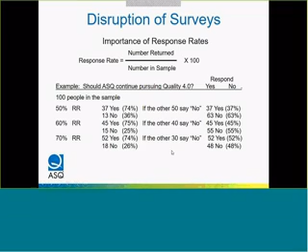And as we look at the response rate increasing, if we have the same 74-26 and the 30 remaining say no, we still have a yes response. So response rate is critical, and it takes a lot of time and effort to make sure the response rate is valid for a survey.

If we want quick information, we can actually take social media information for the voice of the customer. The 5-star ratings that we see when people review products or services, and the comments that they make in those responses from many different sources. So we can take the text, for example, and throw it into something like a word cloud. Interestingly enough, Microsoft Office Word has this capability. You can go into Word in Microsoft Office, and there is an add-in that will allow you to do word clouds.

Then there are what are called dendrograms, where you can actually see the association of terms through branches and get information about interactions of words from what you have taken off of social media. You can't do this for everybody, so you're not allowed to go sneak in and look at the competitor's information, but you can look at social media information regarding your company, your organization, and do these kinds of things. So now what we've done is we've disrupted the survey paradigm and enabled text analytics to be done through taking social media information.

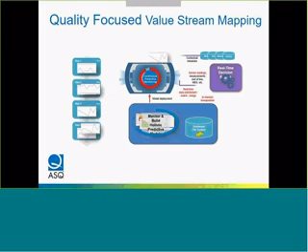The next thing we can look at is the value stream map. As you can see here through this animation, discrete event simulation software can be used to take your value stream map and actually watch how things progress through the process. This does a couple of things for you. One, it can show you how the process is moving, and two, it lets you automate theory of constraints. Anyone who has read The Goal by Goldratt understands the theory of constraints that Goldratt has taught for many years. So now let's look at this in another way. Here's a piece of software that actually does discrete event simulation.

At each one of the nodes in the process, so you put your value stream map into the software, here's your flow, you can actually see in the value stream map the different nodes in your process. The benefit here is that if you're doing something, for example, like a Kaizen event off of your value stream map, you can go out and collect data at each of these nodes, samples of data, and estimate the distribution.

Is it a normal? Is it an exponential? Is it a Poisson? What's the distribution of how things are being processed at each node? Then you can program that particular distribution in and run a simulation. And what it does is then it can show you where are your constraints. So where's Herbie? If you've read The Goal, you know that Herbie is the individual in the book, The Goal, where the author finds where and how to find the constraint.

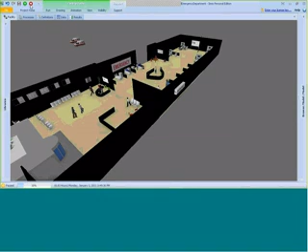I'm going to switch over for a second and show you another piece of software very quickly. This particular piece of software actually gives you the ability to see how a process works. This happens to be an emergency department in a hospital, but you can actually see how this works. You can look at it. It gives you the ability to put in labels so you can see the nodes in your process. You can actually see node labels and see how things move through your process.

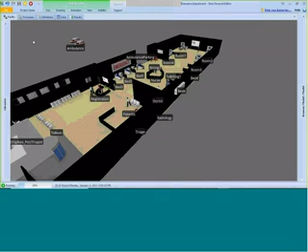So discrete event simulation gives you the ability to simulate what's going on at each step of your process, and there is software like this that allows you to actually see how things are moving. There are examples here that I have for manufacturing. This one is one of the most visual that I use when I'm looking at giving a short talk. See if we can get back to where we were. There we go. So that's discrete event simulation for automating value stream maps.

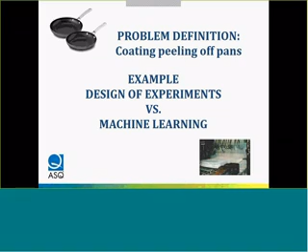So let's see what the comparison is here. So it's an anodized coating that's peeling off. So we're looking at the solution, which is the DOE versus the machine learning predictive modeling approach. The DOE data are collected locally, whereas in machine learning, we can take data from a data warehouse. So now, part one for the execution, let's look at the DOE.

A DOE, we have variables that we control. So the main factor for using a designed experiment is control. You can control the X variables. You have the Y variable, the response variable. And you have noise factors that are in there, which is the error term in the analysis of variance that comes out of the backside of a designed experiment.

So DOEs have some limitations, the number of variables and observations, no use of a holdout set for data, and we'll talk about that in a few minutes, what that brings to the table. And it's not necessarily a predictive model. It's an inferential model looking for differences between the X variables, not really looking to build something that's predictive.

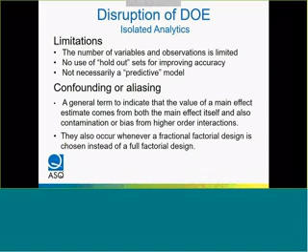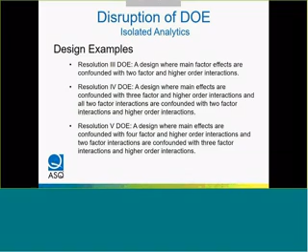Confounding and aliasing, those are statistical terms that show up when you can't take a full designed experiment, you're doing a fraction of an experiment like a Taguchi method experiment. Here's some examples that are in the deck that you'll see when you look at the recording. These are different flavors. All of them have issues as isolated analytics.

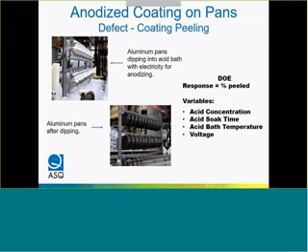So now let's look at how they looked at the problem. They looked at the coating aspect of the process. The pans were dipped into an acid bath with electricity. When they came out, they had the coating, anodized coating on them. The variables that they were able to study were the acid concentration, soak time, bath temperature, and voltage. And the variable that they used as the response is what percent of the surface area peeled off.

So part two, machine learning and predictive modeling. Let's look at that aspect. So for machine learning and predictive modeling, you have data at rest. You have data sitting in the data warehouse waiting to be analyzed. That's used to create a model. So you create a model from data at rest, historical data.

You use that data in motion by then putting it through sample activities to see how it performs in motion. So you've got some test sets, some test equipment that you run through, and you look at it and you use the model you've created to see how it performs. Then you can deploy that model to your organization, called analytics at the edge, or edge analytics.

The best example that I have that most people understand is the fuel injection in your car. The engineers in quality and in the organization built predictive models to see how the fuel flows and what the variables are that are associated with that. They use test engines to take that data, put it in motion, and see how it performed and fine-tune the model. Once the model is fine-tuned to take in, say, speed, RPMs of the engine, the rate of flow through the fuel pump,

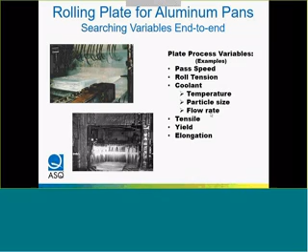So now we can go back up and look at all kinds of variables up here in the rolling process. So we can look at the process end to end from the time the aluminum first gets into the process all the way through to the coating.

So now the interpretation, we looked at percent of the coating peeling off. I'm using in quotes, "known" variables were put into the DOE. I said this a few minutes ago. A DOE works well if the known variables that go into it are actually the right variables to fix the problem. So now the percent of the pans, oh, looky, there's a defect. The number of the pans that peeled and finding the predictive variables.

This is very interesting because I worked on a problem very similar to this back in the 80s, and this is what got me into this whole thing about looking at data end to end. There was a process we looked at in making rolling metal for beverage cans, soda, beer, etc. And what we found was that by looking way back up in the process, we had looked at every variable that we could think of in the DOE, and we didn't fix the quality problem.

Silly buttons. We didn't fix the problem, so we went all the way up end to end and built a large correlation matrix once a week on everything from when the aluminum first came into the process all the way down to where it was made into a can. And what we found was, and I'll show you in a minute, here's how a DOE works, your analysis of variance table. DOE results.

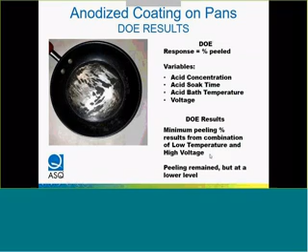The peeling remained, but at a little lower level. So some of these variables were adjusted and it helped. But now, let's look at what came out of the machine learning. Machine learning, this was the key to the whole process.

This particle size variable is what's in that white liquid you saw pouring over the, let's go back a second. That white liquid is an emulsion, and it has particles in it. That was the number one contributing variable, because that was the variable that conditioned the surface of the metal to receive the coating. And when that was out of control, that's when we found that the coating on the pans was peeling.

So when we went back and put a control chart on the particle size and when to clean out that rolling mill and put fresh emulsion in, that's what then minimized the peeling of the coating. So it was not only the strength of the metal and the acid concentration, which these variables came out in the DOE and improved some, but this was the major contributor to the coating sticking to the pan. And we were able to look at 101 variables and over 11,000 data records. We had no resource constraints.